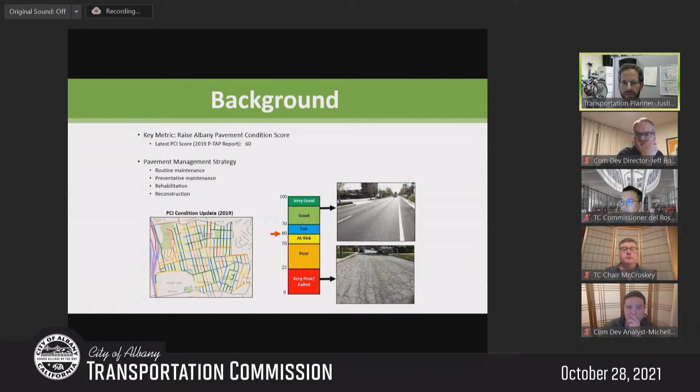The current pavement project roadways were identified in the pavement management plan developed in 2019, as a result of analysis of current conditions on roadways, roadway treatment options, and planned utility work by both the city and outside agencies.

The current set of projects have been separated into 3 phases. The first 2 phases are currently in design. At the June commission meeting, staff outlined Cleveland, Brighton, Key Route, and Ordway for planning work to be presented to the Transportation Commission in advance of those roadways proceeding into design. These were identified by staff for evaluation of potential active transportation and safety improvements to be considered for inclusion in the pavement project.

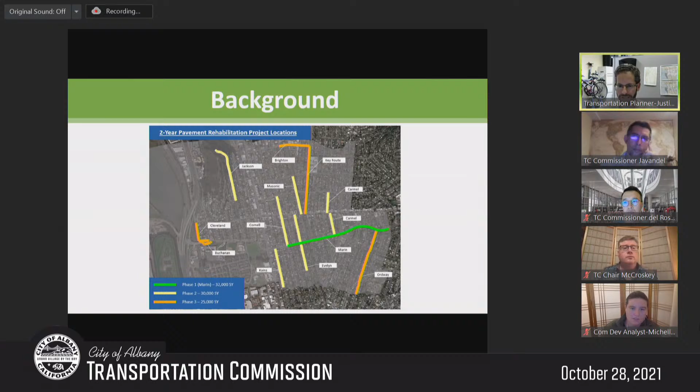First up is Cleveland Avenue. The active transportation plan includes a vision for a north-south shared use path along the eastern side of I-80 between Buchanan Street and Cerrito Creek. Segment 1 of this path is complete, running along the 500 block of Pierce, and segment 2 includes a connection from the end of that segment along Pierce Street and through Caltrans property and city-owned property, part of the Peggy Thompson Pierce Street Park. Development for an affordable housing project at the northeast corner of Washington and Cleveland includes a path alignment that would bring the path down to Cleveland Avenue, approximately 250 feet north of Washington Avenue.

While the vision in the active transportation plan for this facility is for an off-street path, there's very limited right-of-way on the west side of the street before railroad property, and there are a lot of utilities along that stretch as well. So for this repaving project, staff asked the consultants to develop conceptual plans for an on-street bicycle facility in conjunction with the paving project.

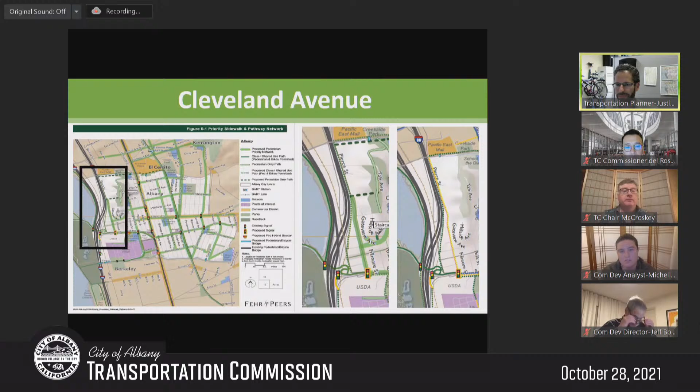Other main transportation network considerations are that this is a truck route. Southbound Cleveland Avenue is the route from the westbound I-80 off-ramp to Buchanan Street, so there are higher vehicle volumes in the southbound direction as well. The other ramps from the freeway all have direct access to Buchanan Street. I'll also note a bus stop outside of the USDA facility. The 80 line is currently suspended, but we will need to check with AC Transit if there's a sense whether the 80 may potentially still run on this segment of Cleveland in the future.

For Brighton Avenue, the active transportation plan calls for a class 3 bicycle route along Brighton. Brighton also runs between the Albany Middle School and the new annex at St. Gabriel Avenue. The commission has previously discussed the Brighton-St. Gabriel intersection at earlier meetings in conjunction with the school construction project.

The commission has also looked in the past at the possibility of a cycle track connection between the Ohlone Greenway and Albany Middle School, most recently in conjunction with the North Albany Traffic Calming Project. So staff asked consultants for the city to develop possible on-street concepts for the St. Gabriel Brighton intersection, as well as for the potential cycle track connection.

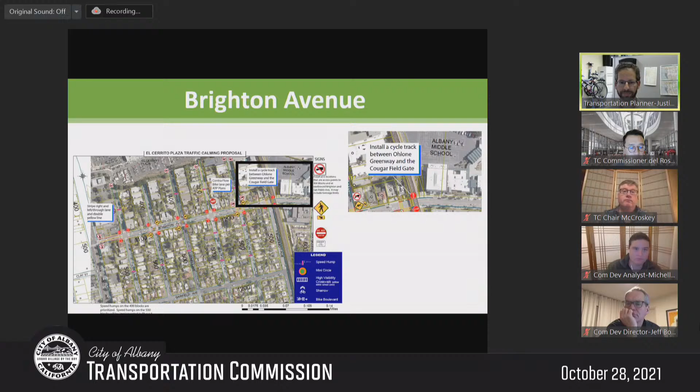The final one for this discussion item is the Ohlone Greenway and Marin intersection. The commission's previously discussed this connection, and most of the intersection design is already completed. This is one element that we wanted to bring back for further discussion. Previously, we had discussed the connection from the westbound Marin Avenue bicycle lane to the southbound Ohlone Greenway. The last design presented to the commission indicated a pullout to wait for the light to change on the street and then to complete the turn.

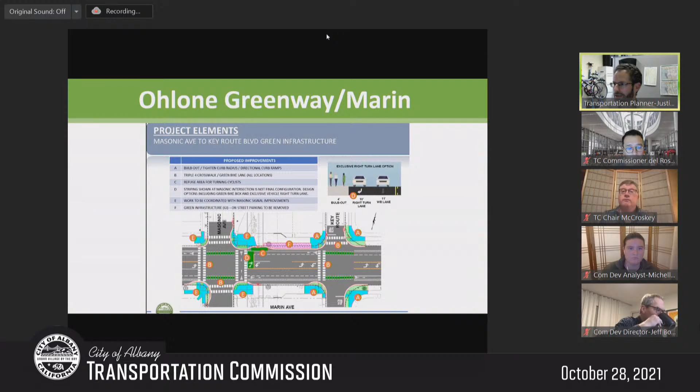There were commission comments indicating an interest in pursuing a design that would bring the cyclist up to the sidewalk level in advance of the intersection, as opposed to that. So we've asked Andrew to prepare a concept of what that would look like. The primary purpose for that is to facilitate that two-stage left turn movement. With that, that completes the background for these projects, and I will hand it over to Andrew to walk through the concepts he's developed.

Good evening, commissioners. Thank you, Justin, for teeing that up for me. We're going to go in the same order as the items presented by Justin, and let me just share my screen. I want to briefly show a street view for each of the segments. I'm not going to run through most of this information. I think the street view perspective of the cross section is going to be informative.

For Cleveland here, from Washington to Buchanan, it's an approximate 37-foot curb to curb width, and this is looking south. The railroad right-of-way is to your right or west, and there are many utility poles, trees, and a pre-existing curb that constrain any work in that area. So our consideration was to see what would fit within the existing curb to curb width. I'm going to switch over to the plan.

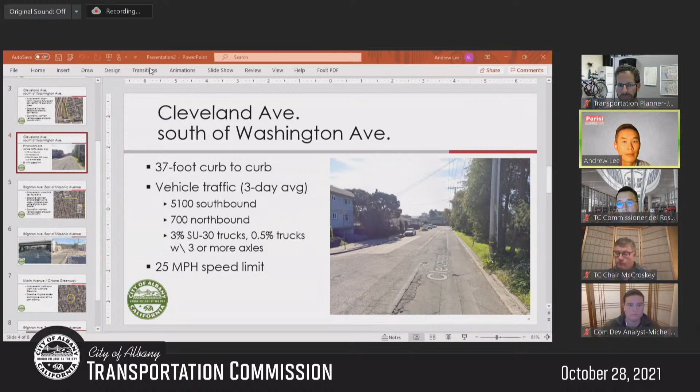All right, so this is Cleveland Avenue. Let me just refresh. This is the existing condition, the cross section. This is looking north, so apologies for the change in orientation. There are residences on the right side of this cross section, and now parking, on-street parking with a travel lane in each direction.

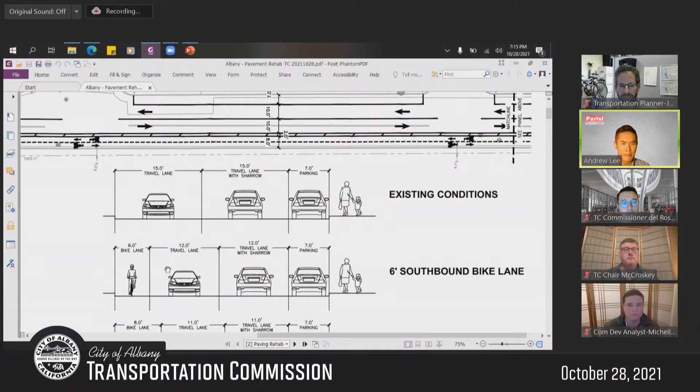As mentioned in Justin's presentation, there is a large amount of vehicle traffic in the southbound direction. We performed 3-day counts on a Tuesday, Wednesday, and Thursday earlier this month and found that it was approximately 5,000 vehicles with around 3% truck traffic in that southbound direction, whereas in the northbound direction it was approximately 700 vehicles per day. So that's a rather large imbalance.

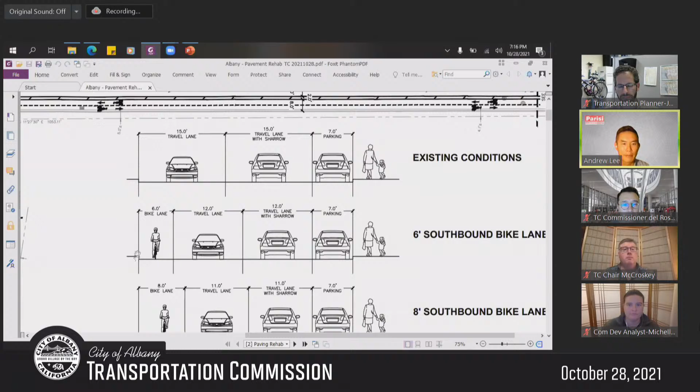Given that, the concepts we designed took into consideration the amount of vehicle traffic and the potential separation that could be afforded to somebody in a bike lane. So with this is an option that shows a southbound bike lane. Given the widths that exist right now, a northbound bicycle facility would need to be a shared lane rather than a dedicated lane.

There is another option that we devised that would further increase the width of this southbound bike lane, which could be striped as a 6-foot bicycle lane with a 2-foot buffer. We just have it shown as a total of 8 feet. And in the northbound direction, similarly, it would be a shared lane facility.

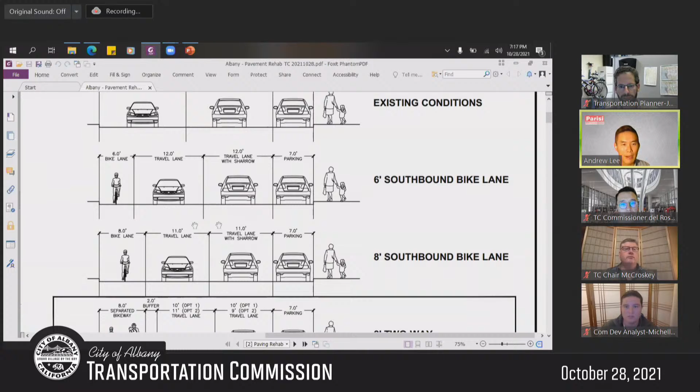We were constrained by lane widths per Caltrans and also AASHTO standards, the American Association of State Highway Transportation Officials, which recommends that for facilities that carry low numbers of truck traffic and large vehicles, including buses, going down to 11 feet is generally accepted, but minimums could go down to 10 feet. But given the amount of trucks coming off of I-80 in the southbound direction, we didn't want to go directly to a 10-foot vehicle lane.

And certainly a 10-foot vehicle lane next to a bicycle facility that was only an on-street bikeway with a stripe was not something that we saw as an all-ages type facility.

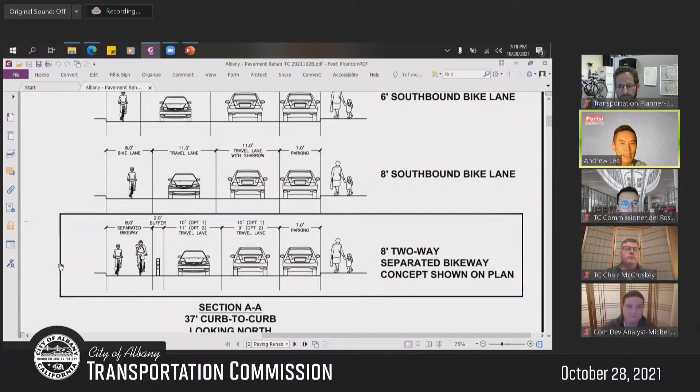So lastly, this cross section here is a 2-way separated bikeway. Caltrans has standards for what are sometimes referred to as cycle tracks. This would place a 2-way facility on the west side of Cleveland. It has certain advantages with very few driveway interruptions, no curb cuts to speak of, except for one infrequently used driveway. Otherwise it's a long continuous stretch.

This provides this 2-way facility that would ultimately connect to another 2-way facility that would pass through the park and connect over to Pierce Street. So it's a 2-way facility connecting to a 2-way facility, so there's some symmetry in that connection.

We have 2 sets of proposed vehicle lane widths. Option 1 shown here is a 10-foot vehicle lane. Now the effective width could feel a little bit wider because there is a 2-foot buffer between the bikeway and the vehicle lane. And so the positioning of a raised barrier closer or farther away from the edge stripe would allow for some wiggle room, per se.

However, given the difference in vehicle volumes between southbound and northbound, we devised a second option, which would provide an 11-foot lane in the southbound direction to accommodate the larger number of trucks and just larger number of vehicles going in the southbound direction. And in the northbound direction, traffic is much lower. AASHTO does allow for 9-foot travel lanes for low traffic facilities.

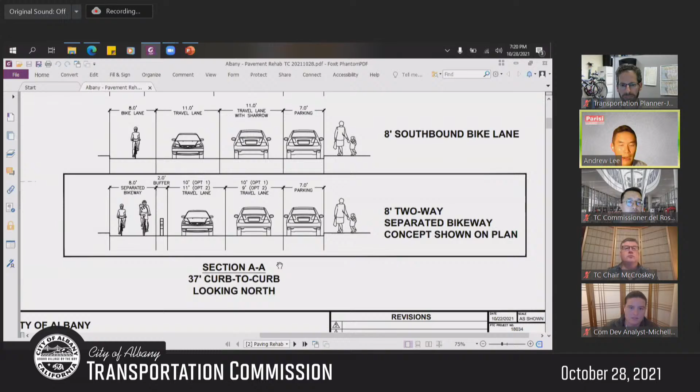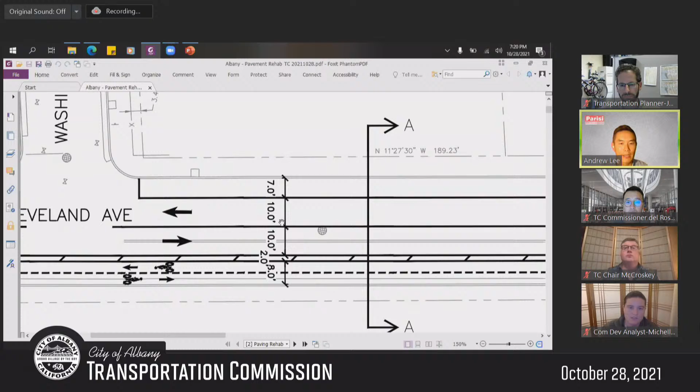In terms of what this looks like from a plan view, starting from the north end, there would be a crossing, not shown on this exhibit, to the future path that would connect to Pierce Street and the park. We show here an 8-foot bikeway facility with the two 10-foot lanes. This is a continuous bikeway facility, so it is not interrupted by intersections with Washington or Solano or any of the residential driveways that would occur if there were a bicycle facility on this east side instead.

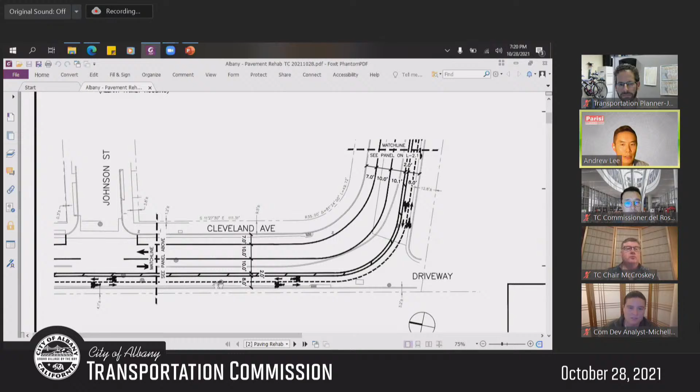As we go past Johnson Street and turn the bend, there is a driveway that I mentioned. And then on the next sheet...

This is a change in orientation, so now north is pointing up on the page. We transition from the two-way bikeway into a shared lane facility that connects to Buchanan Street. This is primarily residential access, and then ultimately a connection to the Buchanan Street crossing and to the path. And then Pierce Street is over here on the screen.

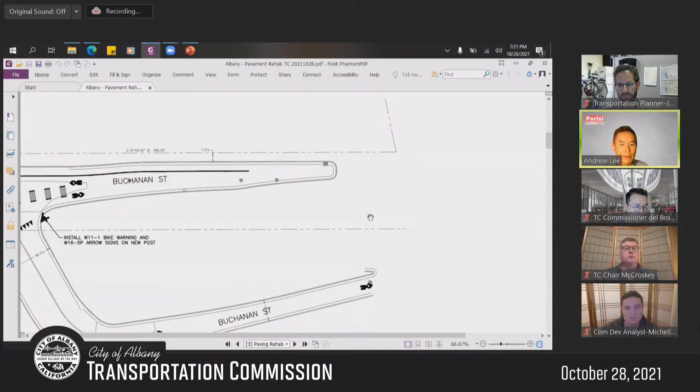So that's the first concept for Cleveland.

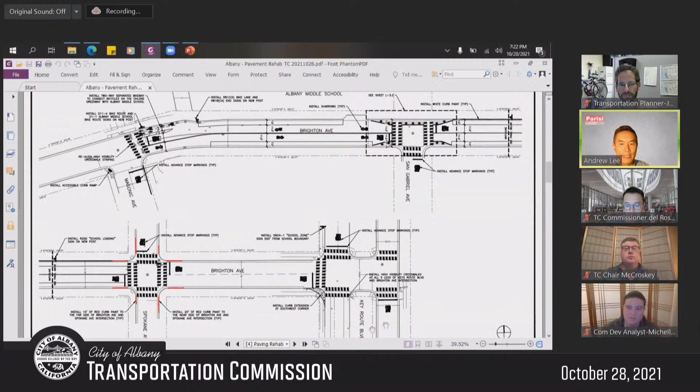Transitioning over to Brighton, let me give an overview. Our project extents were from Masonic Avenue and the Ohlone Greenway on the west end, progressing down the page to our east side terminal at Key Route Boulevard.

The two areas we focused on for this conceptual design were this connection at the Ohlone Greenway where it crosses Brighton. There is an access gate to Albany Middle School, and our understanding is that people traveling to and from the school, whether students or community members using the facilities recreationally, tend to ride on the sidewalk to access this gate, or there may be some cut-through traffic as well. The existing condition in this curbside area is a red curb, so parking is currently prohibited, and the BART facility spans this area.

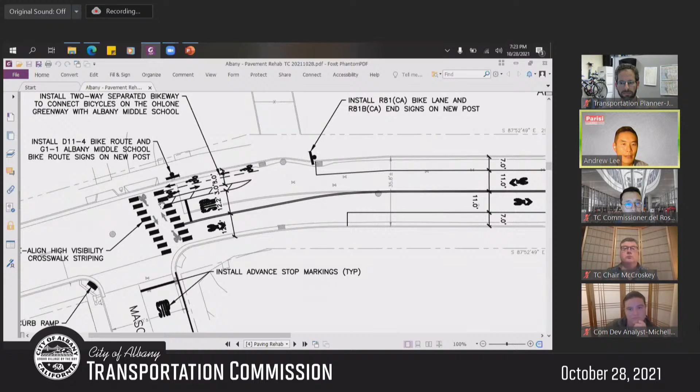So we saw that as an opportunity to provide another two-way separated bikeway facility, 8 feet for the bicycle lanes with a 3-foot buffer. This would require shifting the center line for the vehicle lanes on Brighton to the south. Otherwise, the parking and loading here at Albany Middle School would not be changed.

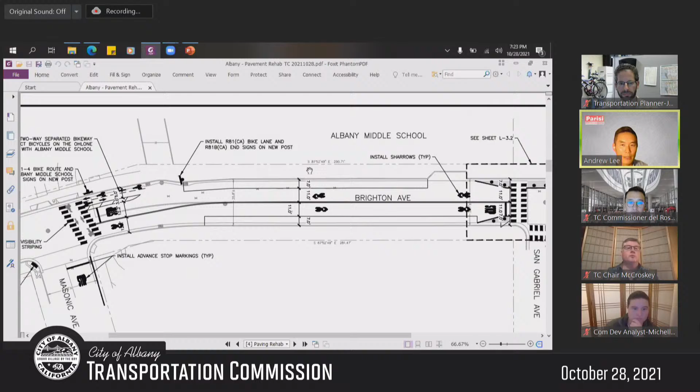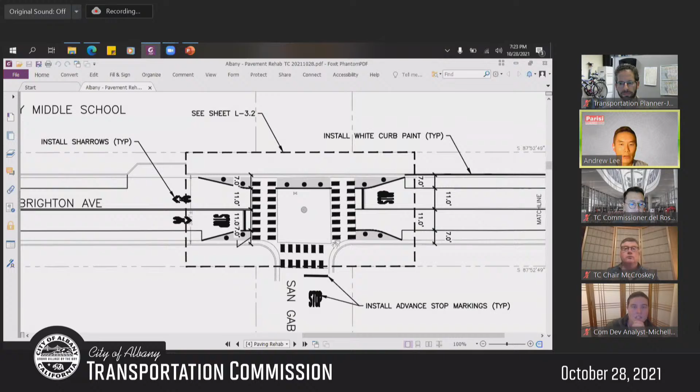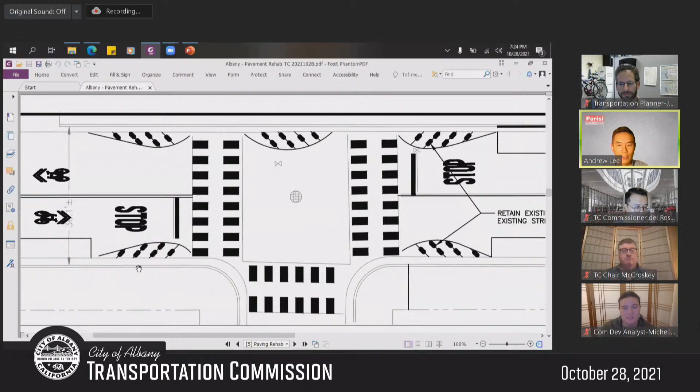We also took a look at San Gabriel Avenue. There have been recent improvements to the curb ramps here, which provide access from the middle school to the annex. In its current state, it has higher visibility crosswalks marked with edge striping to denote areas where vehicles should stay out of. These are sometimes called painted bulb outs, and there are raised features affectionately referred to as armadillos because they're small circular features that look like curb stops.

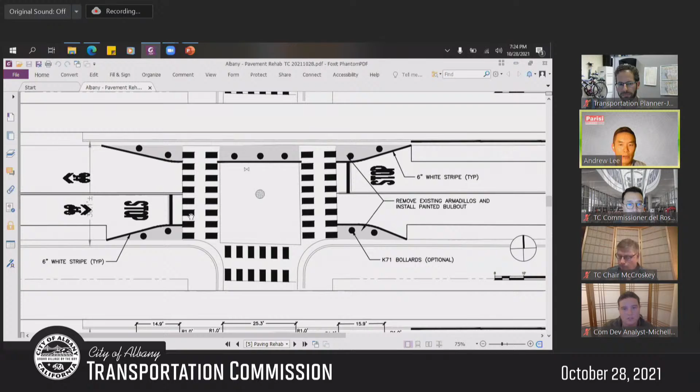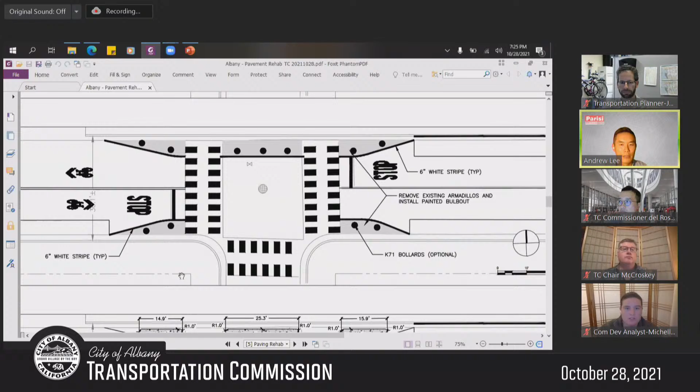Our assignment was to see what could be done to further improve the safety, separation, and comfort for people walking across Brighton, either to Albany Middle School or to the annex. The first option we came up with was largely retaining the existing painted bulb outs, but changing the raised feature from armadillos to about 3 to 3.5 foot tall bollards, which we refer to as K71 bollards. They're different from traffic delineators because they're thicker, about 5 to 6 inches in diameter, and they're frequently deployed these days since they don't get knocked down as easily as the more typical 2-inch traffic delineators you see out there. This design retains the existing curb ramps, so we would not be modifying that at all. It would largely be a striping improvement here on the corners to improve sight lines for people in the crosswalk.

A second option we came up with was to further improve the vertical separation and protection here at the corner, which would take the form of a raised island. These islands would be constructed outside the existing lip of gutter, so the existing stormwater drainage would be retained, but these curb islands would have more of a permanent feature while providing similar benefits of allowing clear sight lines for people waiting to cross at the curb ramps and preventing vehicle incursion into the corners.

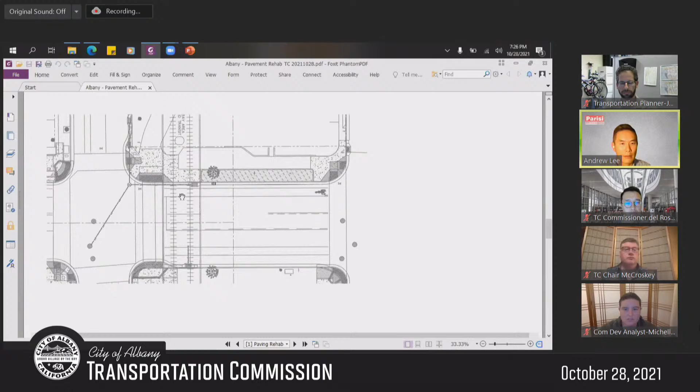All right, the third situation. Mr. Lee asked: on that third option, is that mostly a low-lying improvement? Would it involve any vertical element?

The raised islands typically take the form of a 6-inch curb as the perimeter. They can be higher, but I don't see them much higher than 6 inches in most cases. Within the island, sometimes they are paved concrete surfaces, not meant to be walked on. Other options include cobblestone if you want a low maintenance installation, or plants, especially low water need plants like succulent gardens, though that is a bit of a maintenance concern.

Succulents do also grow very low profile, because we don't want any plants that would go higher than 2.5 feet, which I think is the standard for when it starts to obstruct driver visibility of small children. So there are options within these raised island type features. Thanks.

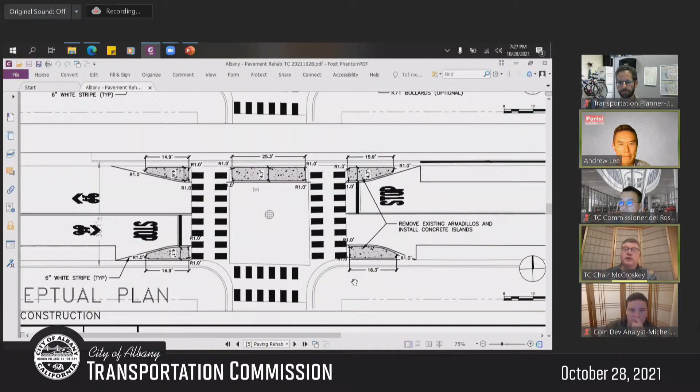For our third location, this is Marin Avenue, with Masonic Avenue to my left. North is pointing straight up. This concept is responding to the Commission's desire for a design that could allow people on bikes traveling westbound on Marin to make the left turn onto the Ohlone Greenway at the sidewalk level.

Right now, under the existing configuration, sometimes people will enter the curb ramp and try to make this tight maneuver, which is rather difficult given the lack of space. So the idea here is to provide a channel in advance of this curb ramp,

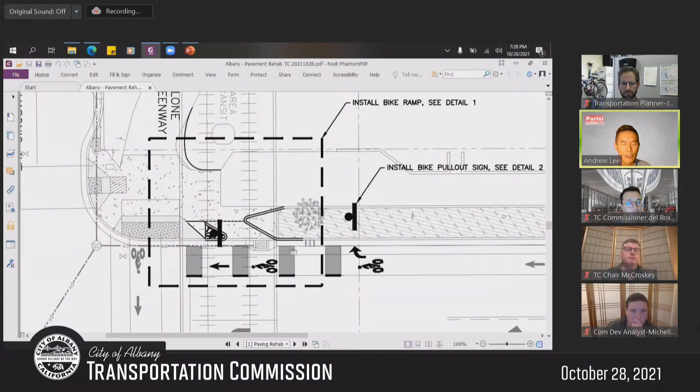which is part of an improvement also underway by the city. So the features to call out here are an approximate 10-foot long ramp area, which results in an effective 5-foot width.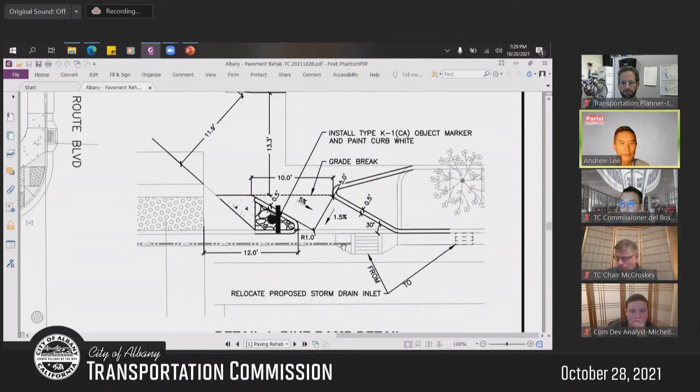We're showing a 30-degree angle, which would be suitable for somebody traveling downhill on Marin. And we would advertise this pullout with a sign in advance of the existing tree here.

This sign serves as notice, as with the stencil, to slow down and enter the cutout. And then a supplemental feature, we would paint this curb white to further show that this is a raised curb area and put an object marker there.

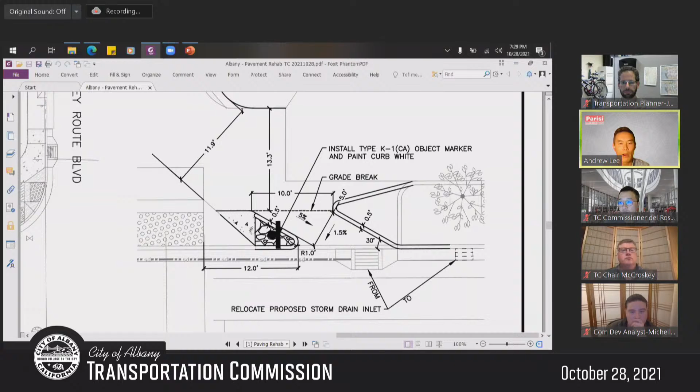We've also noted that this is not a walking area as it matches back to the existing sidewalk, so the idea is that it would be some sort of cobble feature. And just to further flesh this out, this is a concept of what the sign would look like.

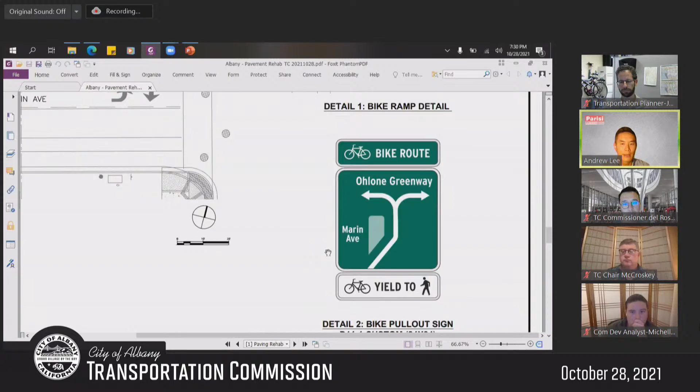We do acknowledge that some people are likely to use this cut-through area to access the northbound Ohlone Greenway. But the design is such that it's not so wide that somebody could take this at high speed. Even if somebody missed it, they would be able to slow down and then access the Ohlone Greenway through the curb ramp.

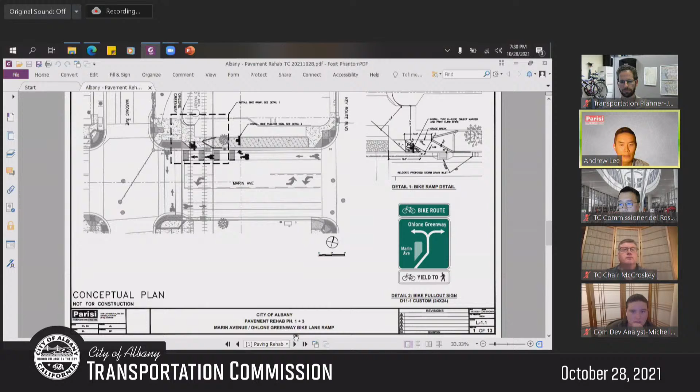That concludes my presentation for these three items. I'll turn it back over to the commission.

Thank you. Let's start with commissioner questions. Commissioner Graham, I have just a couple questions.

Going back to the Brighton, where you were doing the cycle track, is that dimension where you have 8 feet for the cycle track? I can't read the plans exactly. Does that include the gutter area, or is that to the gutter line or to the curb line? That's to the face of curb, so it does include that 2-foot gutter area.

And then what is the connection for the 2A cycle track at Pierce Street? You're saying that's the proposed class 1 bike lane that goes through Pierce Street, through the park from Pierce Street? Is that what we're talking about? But it's not built yet, right? That's correct. Okay, those are my questions for now.

Other commissioner questions? Commissioner Del Rosario. Sure, for the Cleveland proposal, if it was a one-way lane, where would the northbound bikes travel? Would those be on Pierce? If it was a one-way southbound bike lane or separated bikeway, northbound bicyclists could share the lane with northbound vehicle traffic, or they could take Pierce Street, but that's also a shared vehicle lane.

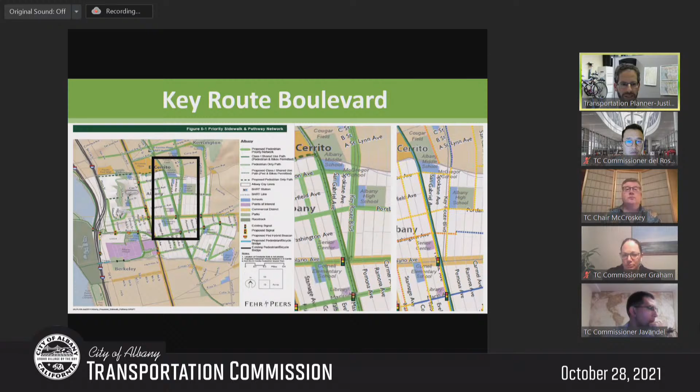The Albany Active Transportation Plan includes a Class 3 bike route on Key Route Boulevard as part of the proposed fast bikeways network. The ATP also includes a boulevard median walking path concept, and signage and striping plans were prepared for much of the on-street bicycle network in the ATP.

For Key Route Boulevard, these plans include a bicycle lane in the southbound direction and a shared vehicle-bicycle lane in the northbound direction, due to differences in roadway width between the two directions. This configuration has not yet been installed.

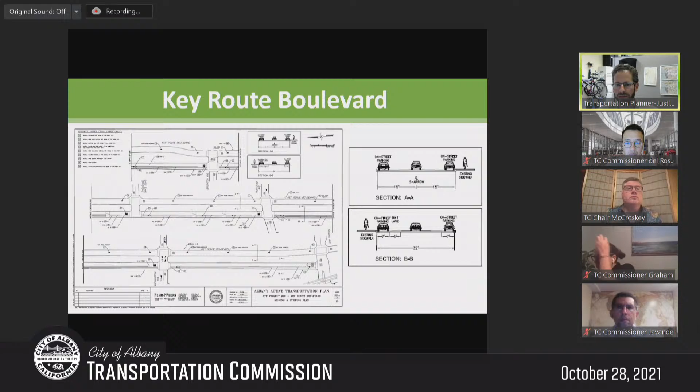More recently, at the December 2020 meeting, the commission discussed and recommended median stops be installed along Key Route Boulevard, similar to what is now in place at the intersection with Brighton. Additional signage and striping improvements at the intersections were also recommended and will be incorporated into the project design. The consultants were asked to prepare conceptual alternatives for cycling facilities along Key Route Boulevard.

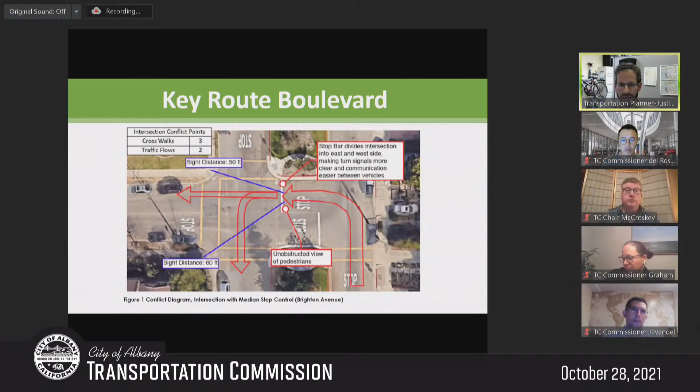As we walk through them, you'll see that some of these are within the paving and within what we'd expect in our roadway paving project. Others may be a standalone future active transportation project, but may inform what we want to do with the paving design. With that, I'll hand it over to Andrew to walk us through.

Thank you, Justin, and good evening again. Let me just share my screen. So we are looking at Key Route Boulevard for its full extent.

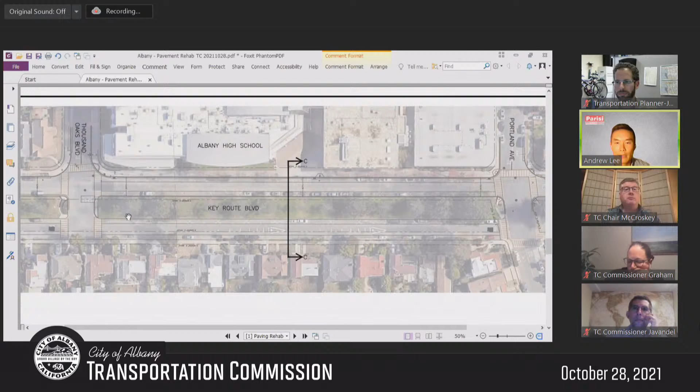I'm showing here an aerial view of one of the more challenging sections, which is adjacent to Albany High School. North is pointing to your left on the screen, and we have some measurements that we took.

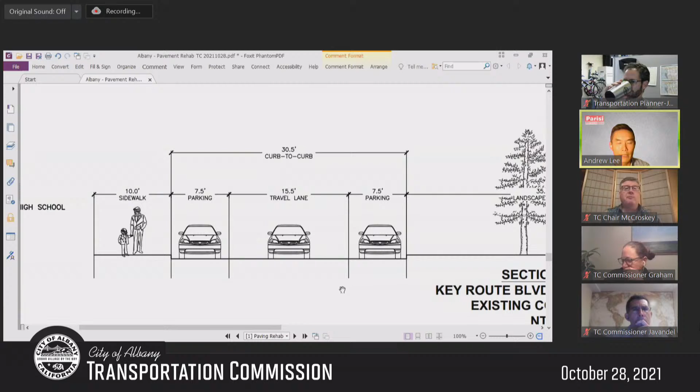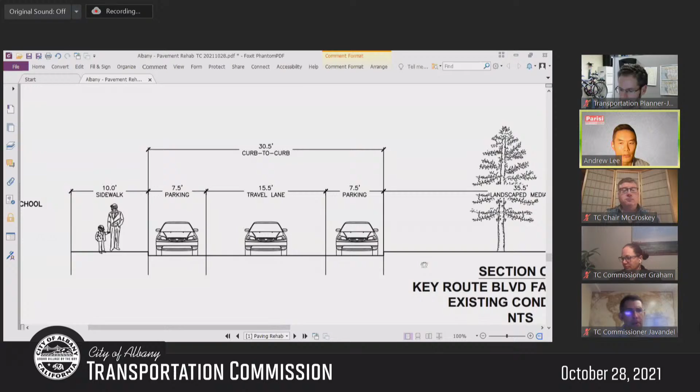There is a difference in width between the northbound lanes, which is what we're looking at here. We measured approximately 30 feet, and these are the approximate dimensions we assigned to the parking. Near the high school, parking is quite well used during the day, and loading activity in this area is quite active during school drop-off and pickup periods.

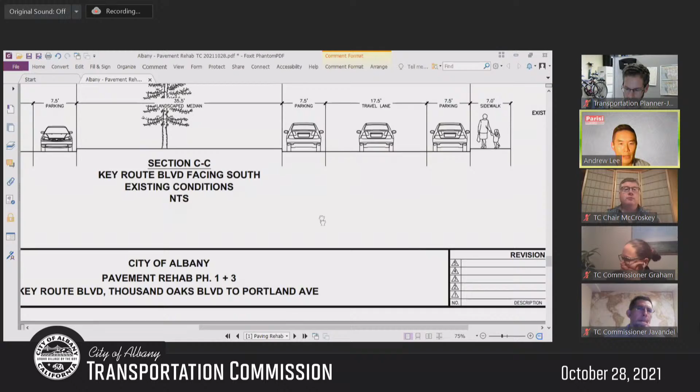In the southbound direction, it's approximately 2 feet wider, and you'll see in further concepts that this additional width affords additional opportunities not found in the northbound direction.

Our first concept here is what we're calling buffered bike lanes. The big trade-off, as shown in this section in the northbound direction, is that the curbside parking and effectively loading would be replaced with a bikeway. Given the demands on curb access, this concept presents one that has more of a separated bikeway or cycle track type nature.

So we show an 8-foot bikeway, which is on the upper end for a one-way facility. As you saw in the previous presentation, it could actually accommodate a two-way facility, although that's not what we're showing here, with a two-way facility on a one-way section of the street.

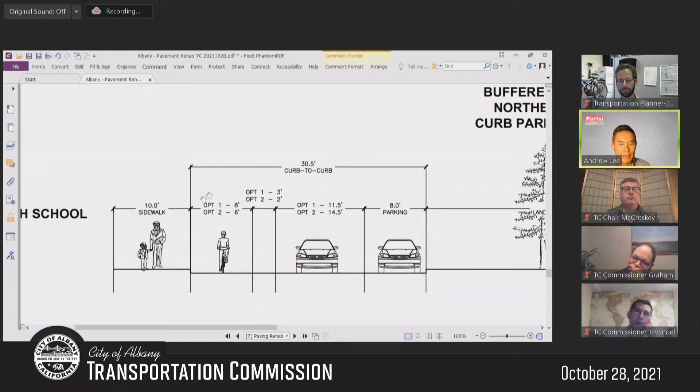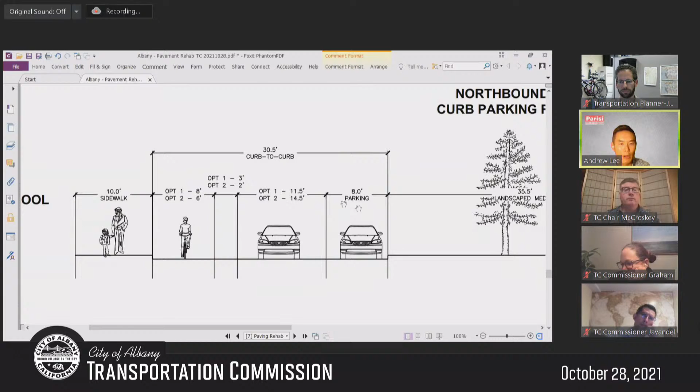This one is just showing a curbside separated bikeway. One concept not illustrated, but that could be described, is that the parking on the curbside could be retained, and the parking on the median side could be the part that's removed, with the arrangement of the bikeway and parking swapped in the northbound direction.

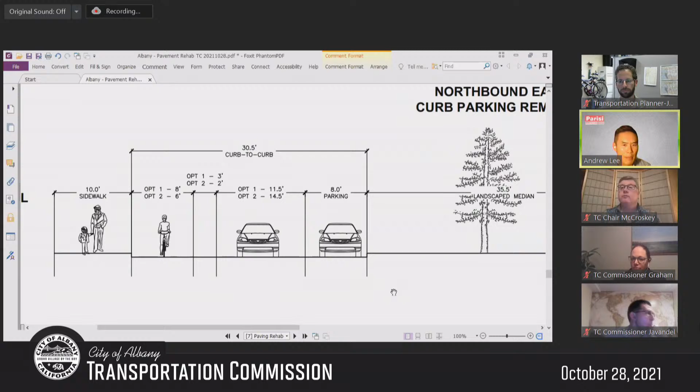We show this in the northbound direction with the assumption that there could be more demand related to accessing the high school and the need for greater separation due to all the loading activity here. In the southbound direction, because we are dealing with 2 extra feet, the on-street bike lane could be striped without any removal of on-street parking.

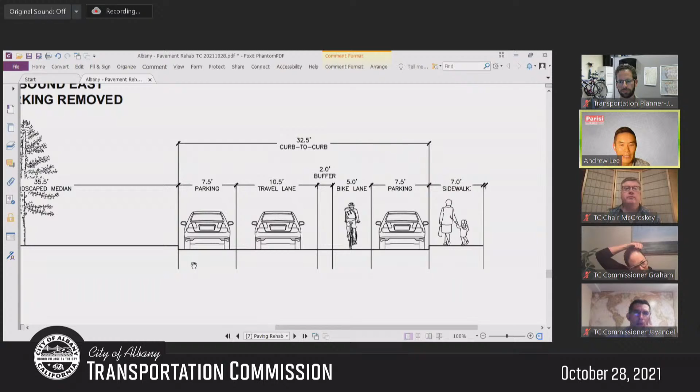And so that leads to another concept not illustrated, which is that if there was any reconstruction of the median to widen the northbound lanes, a buffered bikeway situation would be able to be accommodated.

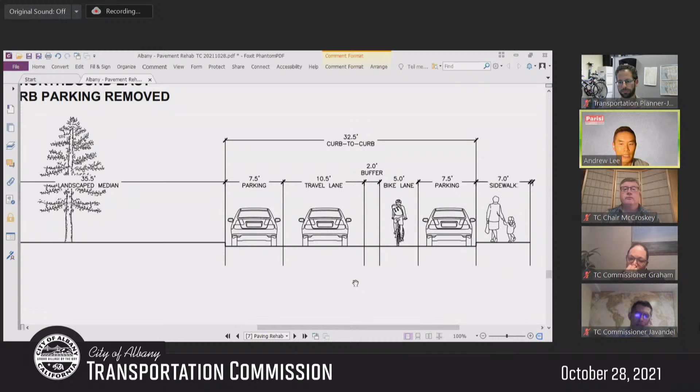I will note, however, that given loading and unloading activity adjacent to the high school, we've seen in other locations that vehicles using this bike lane, in that it's not buffered by any raised separation, that double parking and loading in the bike lane does tend to occur.

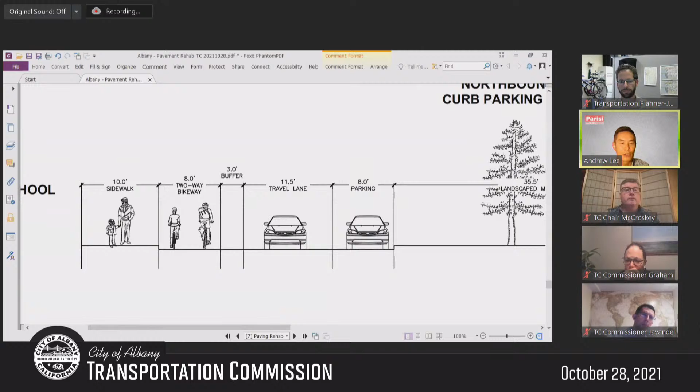This is essentially the same as the prior concept in terms of facility width, but we show a two-way bikeway running curbside on the northbound side of Key Route Boulevard.

This does present some challenges related to how a person on a bike navigates through an intersection. It does result in some potentially unexpected movements for people driving or walking, to have a two-way facility on one side of the street.

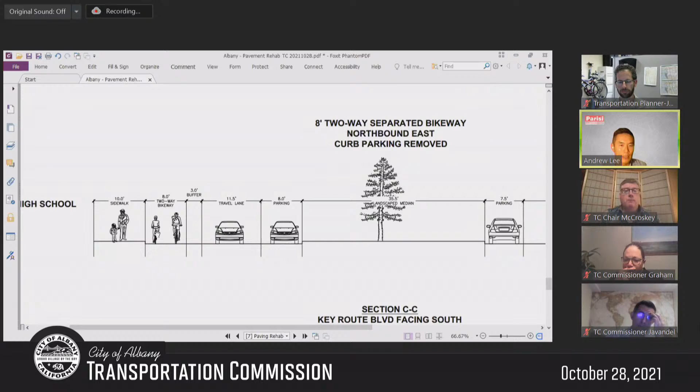But that is an opportunity that could be realized if the parking on the curbside was removed.

The two-way bikeway is actually more conflict prone adjacent to the median, because it does result in, I think, more unexpected movements at intersections.

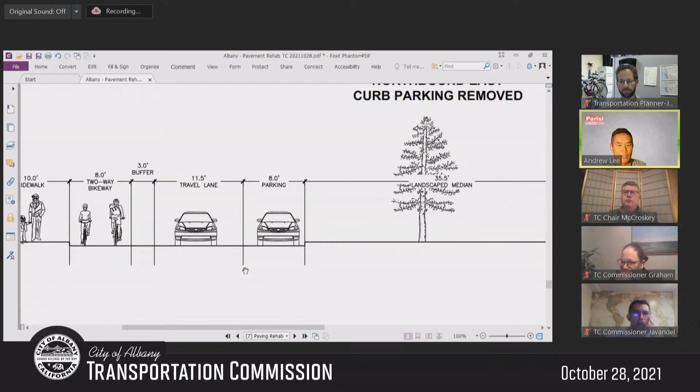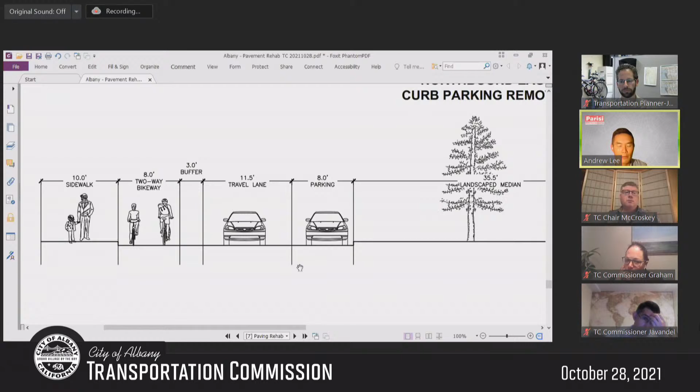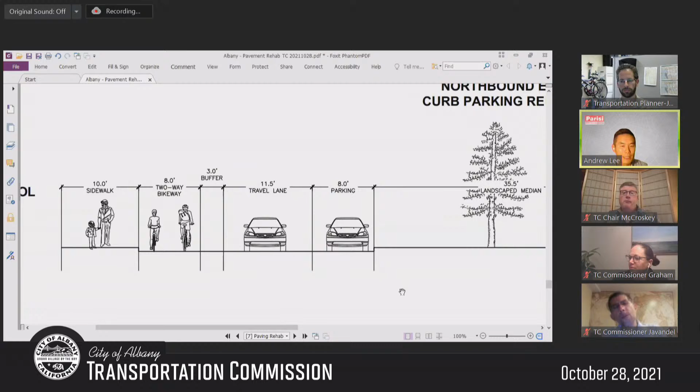Although the benefit of a median-side two-way bikeway is that there is less potential conflict with residential driveways. As we examine Key Route to the north and south of Albany High School, where there are a lot more residential driveways, a two-way bikeway facility in the residential parts of Key Route Boulevard would result in a lot of unexpected conflict for people driving in and out of their residential driveway.

The southbound direction isn't showing an on-street bike lane, but the prior concept with a southbound bike lane could still be retained.

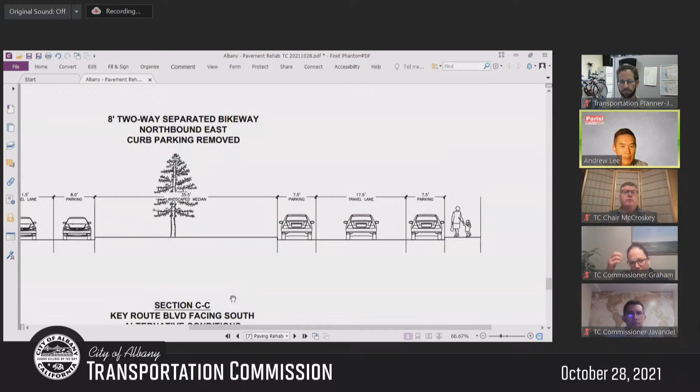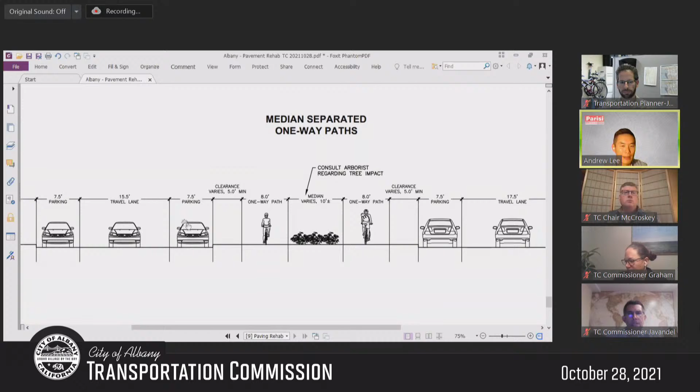In consideration of a bikeway that does not require either removing parking or moving the median curb, there is ample width within the median for a potential paved facility. We came up with two such concepts. One would be a pair of one-way paths that we're showing as 8 feet.

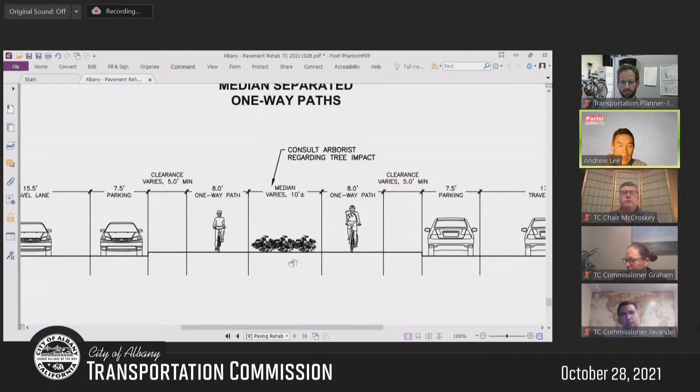The idea here is that with the presence of large trees in the median, the path would be more of a meandering alignment that could try to stay away from tree roots and other tree impacts. Whereas a two-way multi-use path, being wider, could possibly have more tree impact than a pair of one-way facilities, albeit that the amount of paving with a two-way multi-use path would be less than what would result from a pair of one-way paths.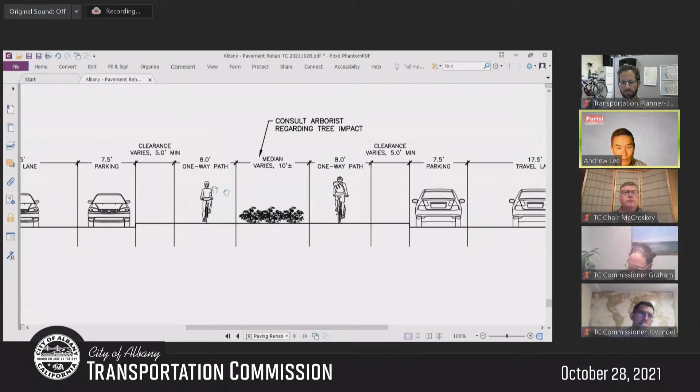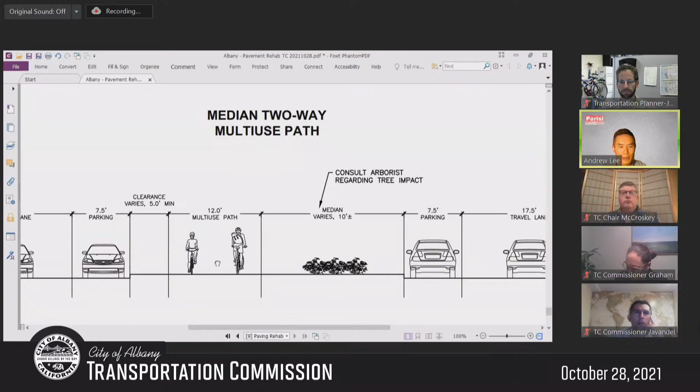I'll also note that we're aware that people walking may also want to use such paths, and so a pair of narrow paths could result in less utility for people walking and biking to share such facilities, because people don't necessarily walk in the direction of bicycle traffic, whereas a two-way path could be more easily shared.

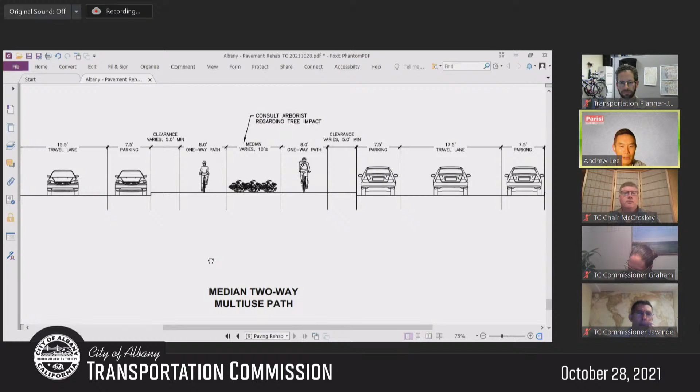But both of these concepts are contingent on an amount of work in the median that could affect the trees. That is essentially the set of options that we devised. There are significant trade-offs for each, and there wasn't an obvious candidate that really jumped out to us.

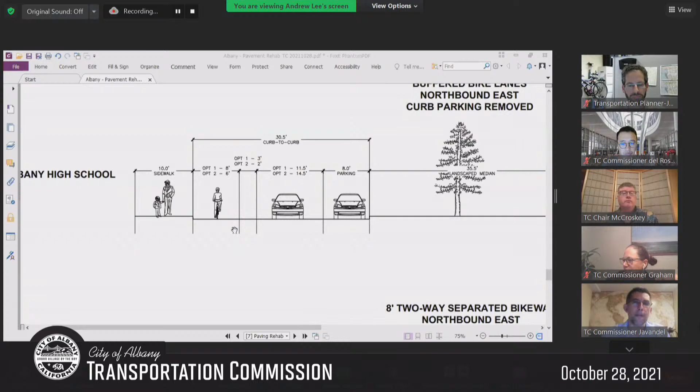If I could pull up the screen, maybe I could use that to respond to that question. To respond to Commissioner Javandel's inquiry, just to clarify, this bikeway width could be a little different, but resemble what's shown here. There would be a buffer for passenger loading and unloading, the parking would be adjacent to that loading zone, and then moving traffic would be on the median side. Did I interpret that correctly?

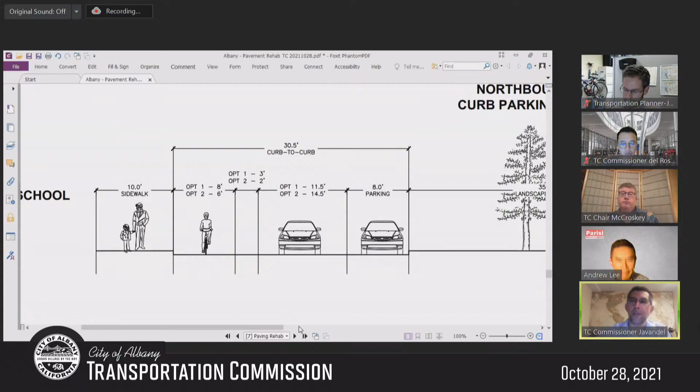Correct, that's it. Okay, I did not consider that option, but as with the other suggestion, there are some merits worth considering. I feel like that might be more attractive next to the high school where there are no driveways. Where there are driveways, it means we'd be keeping the parking on the side with less capacity because of the driveway interruptions. But it is a trade-off.

Seeing you've muted yourself, I'll move along.

I'm curious about the northbound and southbound connections, and also the navigation at intersections along this route. Especially problematic seems to be getting across intersections for on-median paths. What's the transition at the north and south of the area involved? I assume we're talking about Brighton and Solano, but I'm interested to hear your thoughts.

Starting with the transition at intersections - that was a consideration of ours as well, but there were so many permutations that we did not draft up those intersection designs. If there was a two-way bikeway, there are advantages in an all-way stop controlled intersection, since everybody has to stop, so striping diagonal movements isn't going to result in contradictory or non-intuitive movements. If everybody has to stop, moving diagonally through the intersection is possible.

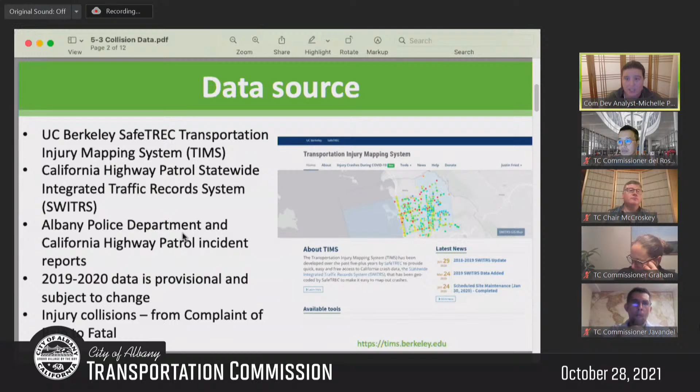I'll just note that the 2019 and 2020 data is still provisional, so it might change. There may be collisions added at a later point or things edited. And these are specifically injury collisions, so anything from complaint of pain to fatal.

The last time this commission received a review of this data was in July of 2020. This report covers collisions throughout the year of 2020, so from January through December of last year. As I said, it excludes the freeway, and specifically it's focusing on pedestrian, bicycle, and severe or fatal vehicle collisions. So those are the categories we're looking at here.

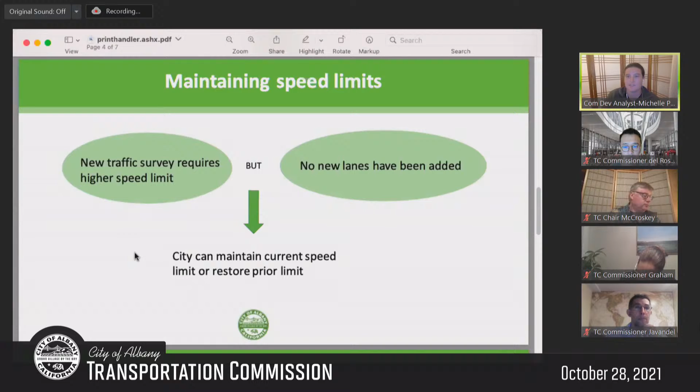And then the other major change has to do with school zones. Current law says that you can create a 15 or 20 mile an hour school zone on streets that are in residential districts with a maximum of 2 traffic lanes and a maximum of 30 miles an hour as a speed limit in areas that are not directly adjacent to the school. Based on those criteria, Buchanan, Solano, and Marin cannot be listed as these 15 or 20 mile an hour school zones. They have to stick with the 25 mile an hour limit.

AB 43 doesn't actually change the rules in regard to school zones, but it creates a new type of criteria that could potentially allow us to lower the limits in those areas. That's the safety corridor aspect of this. So a 20 mile an hour speed limit is now allowed in safety corridors or areas with high concentrations of vulnerable groups. Both those terms still haven't been fully defined.

In a few months, the Department of Transportation is going to release more on the definitions of those. We know that safety corridors are limited to only 1/5 of streets. And we expect that, just based on the way they're described, that areas around the schools would probably fall into those categories, and maybe some other areas around the city as well.

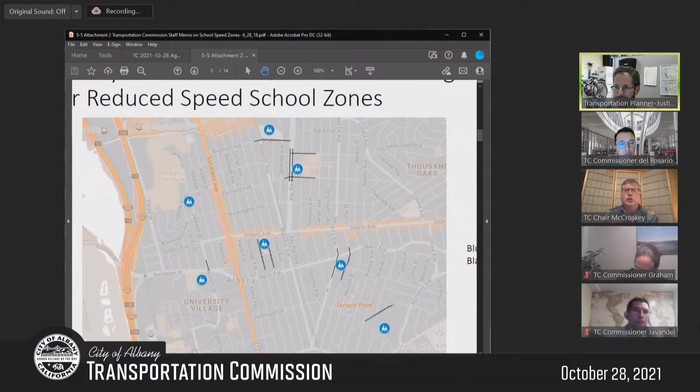Can you scooch over to the right so we can see the key? I can't actually see the difference between blue and black, or I'm not perceiving the difference. Blue is just the icon versus the black street segment. Right, so we're limited to only reducing the speeds on the black segments. And until sometime in 2024, we don't expect to be able to change that at this time.

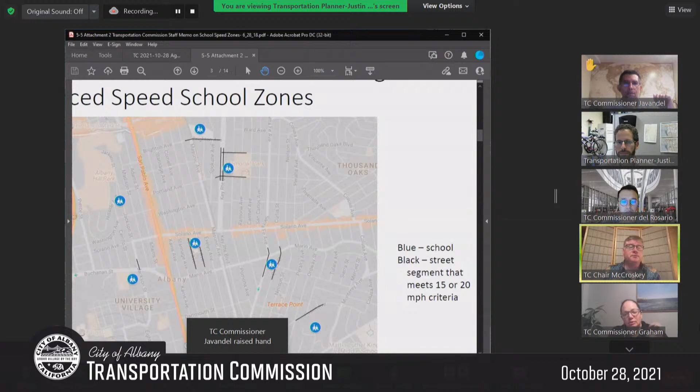Commissioner Javandel: So I think that, unless I'm misunderstanding, what Justin was telling us was that based on the existing state law for school zones, the streets that he's highlighted could be reduced to 15 or 20 miles an hour. That's not something provided by AB 43. So the existing law would allow us to do that on those streets, so we can just have the city council declare a 15 or 20 mile an hour school zone on those residential 2-lane streets.

I believe there was some discussion last time this was involved in other cities in terms of whether required engineering and traffic studies need to be conducted, even though you're allowed to do it. So if you wish to pursue that, I'll have to investigate exactly what steps we would need to take before we were ready to do that. But the law does allow it currently for those segments. For City of Berkeley, that decision kind of came from our attorneys, so I think we would recommend the same approach for Albany, to consult legal counsel.

Commissioner Graham: I was just going to suggest maybe we could make a motion for staff to take this all under consideration and come back to us with a proposal of how we could implement either of these two changes. So both school zones and Solano Avenue? Yes.